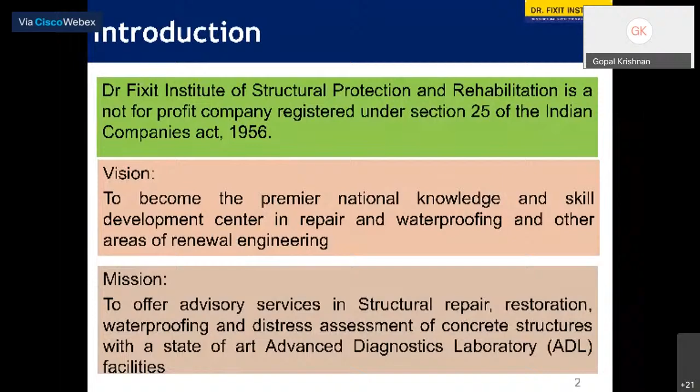My organization, on behalf of, I'm from Dr. Fixit Institute of Structural Protection Rehabilitation, which is a not-for-profit registered company, registered under Section 25 of the Indian Companies Act. Our vision is to become a premier knowledge center in the country on repair and waterproofing and other areas of renewal of engineering. Our mission is to provide advisory services on structural repair, restoration, waterproofing, distress assessment of concrete structures with state-of-art advanced diagnostic laboratory facilities, which is created at Mumbai. So we have been providing these services for the past 12 years successfully across the country, to several industrial, corporate, individual, or many institutional clients. That is a brief introduction of my organization.

And my organization is having a tie-up and collaborating with international bodies: the Concrete Institute of Australia, National Roofing Contractors Association of USA, the Concrete Society of UK, International Concrete Repair Institute of USA, where we collaborate on the latest development techniques. We even call our experts, exchange information, and understand the latest developments across the globe. We are having collaborations with several organizations, many at the national level, which I'm mentioning here.

What do we do exactly? One, we try to provide a holistic solution, because now during the monsoon or later part, leakage is one of the main issues for individual house owners, corporate or commercial establishments, or industries. So we provide a scientific solution. That is one. Second, we conduct petrography on rock, aggregates, and concrete to understand the mechanism of deterioration, for example in fire damage structures. It's an important tool to understand the sensitive damage, what temperature the damage happened at, and what is to be done. So understanding that gives a little bit of investigation into fire damage structures by using petrography technique.

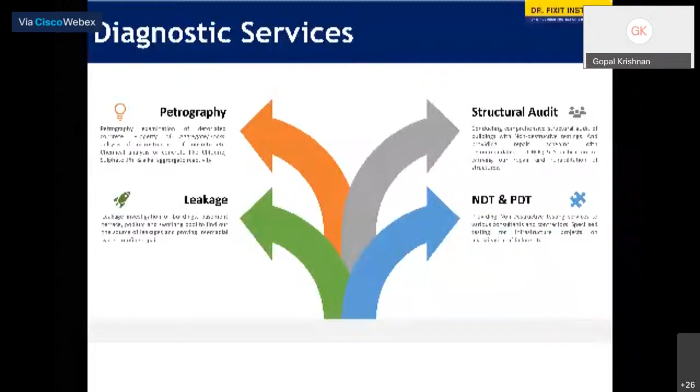The third one, we conduct condition assessment of industrial buildings, industrial structures, and houses or commercial buildings. We call it structural audit. There we provide all the details and start the testing—some partially destructive testing to understand the properties of structures. We provide this service to consultants and predominantly other agencies in the country. So these are our main services. What I explained here, I can show that there is an advanced diagnostic laboratory which is located at Mumbai.

All the facilities got accreditation from the National Accreditation Board for Testing and Calibration Laboratories. In short, if I issue a certificate from my laboratory, it is not only valid in the country, it is also valid globally.

Even other countries can recognize and accept it because it follows international standards, and we have accreditation for that, which we have been maintaining. Not only that, we are providing proficiency testing services to other testing labs or agencies. When they go for accreditation, this is a mandatory requirement for them to complete. Yearly, 100 to 150 individual organizations come to us, participate, and show their competency after getting certified by us. For that also we have an accreditation.

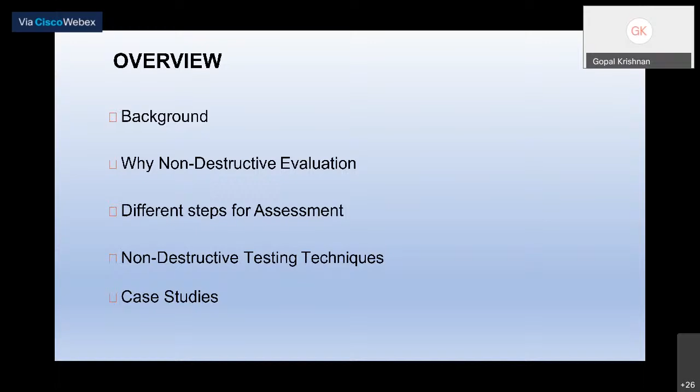Meanwhile, I'll be playing some audio visuals. If you are having any issues, let me know so I can try to set it right. Am I audible? Is it okay now? Yes sir, audible.

Let us start with a bit of background on what happened. Since I am staying in Mumbai, I know what's happening there very much. I may not be knowing your place, so you have to tell me the situation there about the durability of the buildings.

In Bombay, it's a routine every year. During the monsoon, we get to know this building collapsed in a particular area, another building collapsed, so much life lost and other things. We never have a monsoon without such an incident. Even this year, there are already 2 incidents in Bombay, one in the suburb and one in the city.

So 1.5 lakh buildings got BMC notice to get the structural audit. There is another news also: structural audit of old buildings largely ignored. Yes, many of our people don't honor this law or don't follow it. Hardly a very few percentage of people go meticulously, conduct the audit, submit the report to BMC, and take the repair, rehabilitation, whatever is required.

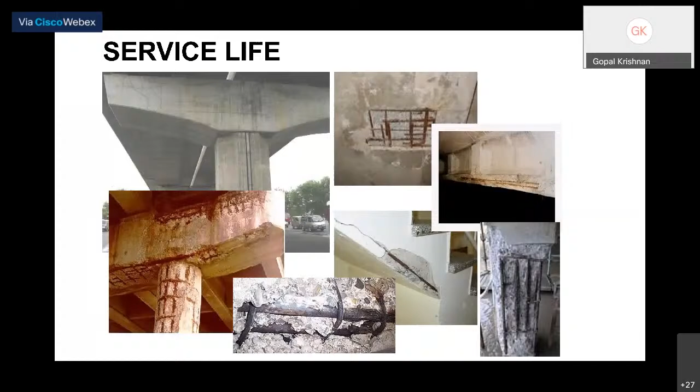Okay, now when talking about service life, we need to understand all buildings are not achieving the service life. What is service life? It is defined as the assumed period for which a structure or part of it is used for its intended purpose with anticipated maintenance, but without major repair being necessarily done. So without necessary repair, regular maintenance like painting, some patch repair, that's okay. Major repair like strengthening, jacketing of beam, column, or structural members should happen only after the service life.

That is for the other European countries, other countries in the cold region. Mainly carbonation, chloride ingress, and alkali silica reaction are the parameters affecting service life. But when you understand durability, what are the others? Weathering action, chemical attack, or abrasion, while maintaining its desired engineering property. So those factors affect the durability.

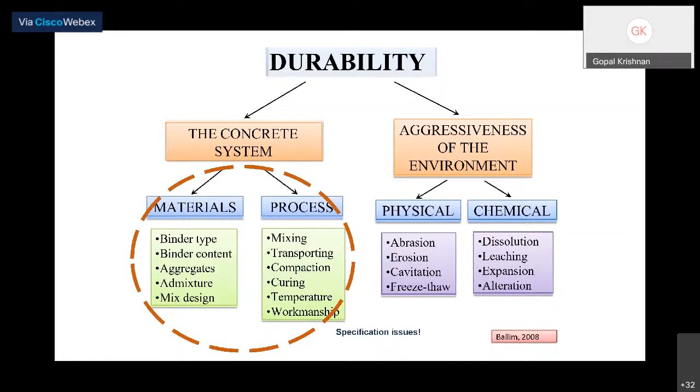So these are very important things. Material and process are in our control, we can do a better job here. Now, when talking about durability, the cover concrete - many people ignore the cover concrete, they don't give it much attention. Cover concrete is what provides durability to the structures. You have to remember that.

So cover broken means what happens? You get exposed the core, easily the reinforcement gets affected. So the cover needs to be protected.

One is depassivation of the steel reinforcement due to external environmental conditions - that is the first phase. At this point, corrosion is possible, but there is no observable or actual physical damage visible in this first stage. The development of corrosion occupies a volume significantly larger than the original steel - generally we say the rust occupies 3 to 6 times the volume of the original steel. So what happens is cracks form, the crack widens and facilitates penetration of moisture and aggressive substances into the concrete, promoting a faster rate of corrosion, eventually leading to spalling of the cover concrete.

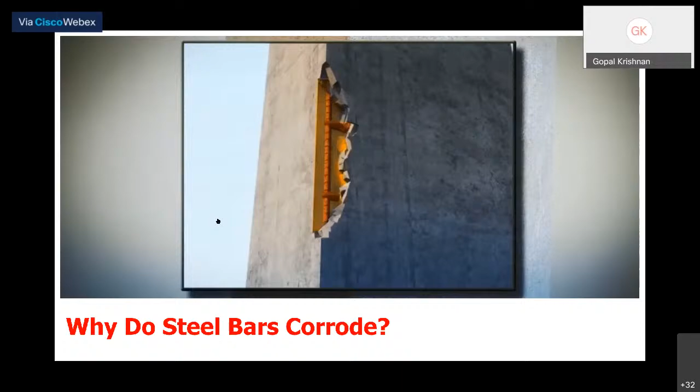Corrosion can be described as a process, a chemical reaction, where refined metals such as steel and iron return to their more stable combined forms as oxides, carbonates, or sulfides.

In this chemical reaction, a section of the steel material acts as an anode. This means that the steel loses electrons.

On the other hand, another portion of the reinforcing mesh acts as a cathode. In the cathode, oxygen combines with water and the electrons to release hydroxide ions. This shows that the reactions require both water and oxygen to occur.

The volume of corrosion products, especially Fe2O3, is significantly higher than the original steel. This will increase the internal pressure and consequently crack the concrete.

We know that the availability of these three elements are essential for corrosion to happen. The reaction requires water and oxygen. However, experiments in real case scenarios show that chloride plays a key role in the onset of corrosion.

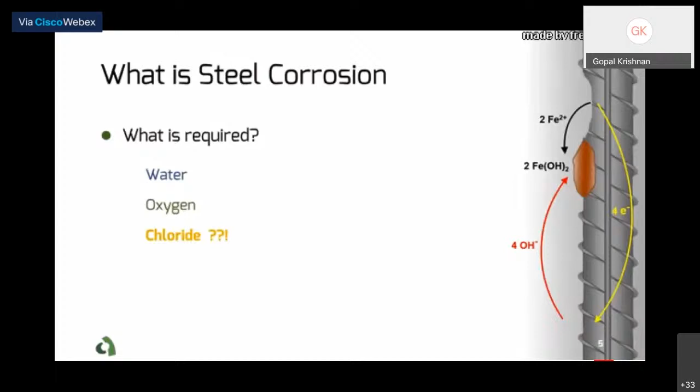Concrete provides a high alkalinity environment around the reinforcement. In normal conditions, one can expect this will protect the reinforcing bars from corrosion. At the same time, we know that concrete is a permeable material, as moisture and aggressive ions can move through the pore structure of concrete.

The interesting question that arises here is the role of chloride ion in this reaction. This has been the topic of research for many corrosion specialists around the world, yet there is no definite answer to it. A very basic explanation is that the ingress of chloride destroys the protective oxide layer on the surface of rebar. This eventually destabilizes the protective film over the reinforcement, which eventually leads to the initiation of corrosion.

As I mentioned earlier in this presentation, the porosity of concrete makes it possible for ions to penetrate into concrete and make the concrete itself act as an electrolyte.

Corrosion happens in this environment, and the movement of electrons in concrete creates an electrical potential field inside concrete over the surface of rebar. For example, the reactions in the anode, where steel loses electrons, can create a potential difference of negative 780 millivolts compared to a standard copper sulfate electrode.

The cathodic reactions would result in a potential difference of positive 160 millivolts.

The traditional way of investigating corrosion is visual inspection. However, when damage is detected in visual inspection, it is already too late. Signs of corrosion are often marked with delamination, which is the result of corrosion materials expanding.

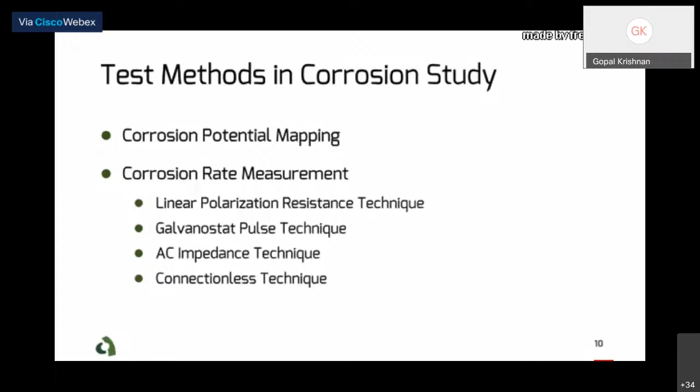The second concept is the rate of steel corrosion. The corrosion rate is about the kinetics of reactions and how fast the corrosion is progressing in the concrete. This becomes important in the context of life cycle assessment, as it helps engineers better predict the remaining service life of a given structure. So let's talk a little about these concepts and measurement test methods.

The half-cell test can be used to predict the corrosion potential from the surface of concrete. Several associations have standardized the test procedure, including ASTM, UNI, and RILEM.

In the half-cell potential method, the potential values at the surface of concrete are measured with respect to a reference point.

Concrete surface should be prepared before doing the test, that is to remove paint or other non-conductive layers from the surface. The surface should have a minimum amount of moisture. A sound electrical connection should be established between the reference electrode and reinforcement.

The value is normally presented in contour plots, showing different half-cell potential values. This helps identify areas with a higher chance of corrosion.

For example, ASTM C876 introduces 3 different ranges for the measurement. Half-cell potential values less than negative 350 millivolts, measured in reference to a copper sulfate electrode, represent an area where probability of having active corrosion is more than 90%.

When measurement is higher than negative 200 millivolts, this probability is less than 10%. Results for half-cell potential values between negative 200 millivolts to negative 350 millivolts is uncertain.

Corrosion can be described as a process. Let us continue further. To understand the corrosion and deterioration mechanism, we conduct a structural assessment.

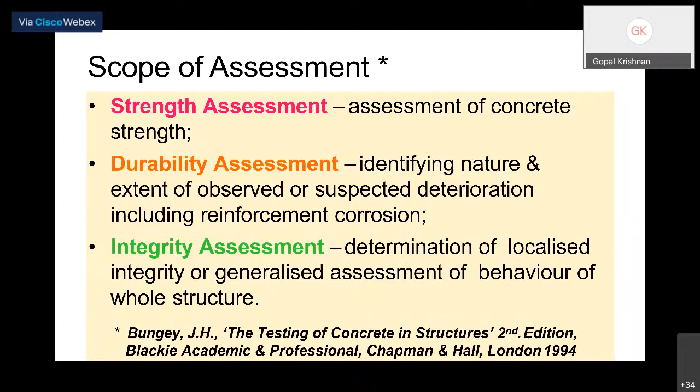For conducting structural assessment, there are different scopes. One is strength assessment - if you want to assess concrete strength, we can do certain tests. Durability assessment involves understanding the deterioration, whether corrosion has happened and to what extent. Integrity means understanding the behavior of the whole structure. So the scope of assessment needs to be defined initially before we start.

Non-destructive testing evaluation is required for routine inspection checks, like condition assessment of structures with a given frequency. It may also be for legal purposes - the seller wants to know the condition, or the buyer wants to check the condition of the building. Then maybe the structure is in distress and they want further planning - whether we need to redo or repair. The third reason is when doing repair rehabilitation, what extent is needed, what is the cost, when it can be done.

And finally, retrofitting to current new standards. That means if you're currently occupying and using the building for some purpose, you want to convert or increase the live load or dead load, or add two floors above. So you try to understand the condition from a retrofitting point of view. This covers all the requirements for evaluation using non-destructive testing.

Structural testing is required mainly to determine strength, or to check the quality and condition of the structure, or whether there's any integrity issue. If there's any localized issue in a specific area, we check that to assess the potential durability of the structure as a whole, and to identify the causes and extent of deterioration currently happening. These are the reasons for conducting structural testing.

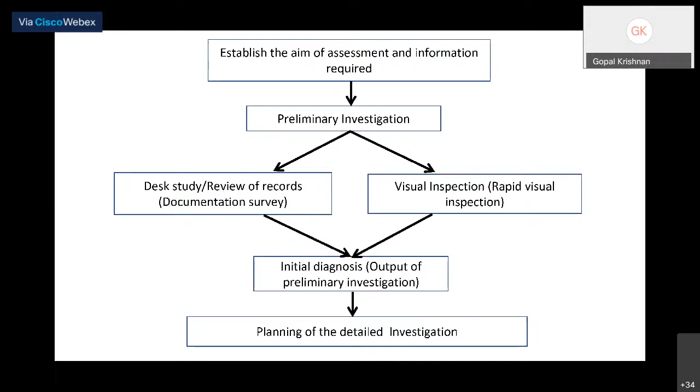We do preliminary investigation, desk study, reviewing document records, repair history, etc., and rapid visual inspection to identify deterioration and its reason. Then we do diagnosis and planning for what is required further - that is planning for the detailed investigation. This is the initial assessment.

When we go into detail, we do sampling, because we cannot test every member. So we select members - how many percent and how many members we are going to test. We conduct initial in-situ testing, then send samples to the laboratory to understand the strength, properties, and chemical properties, etc.

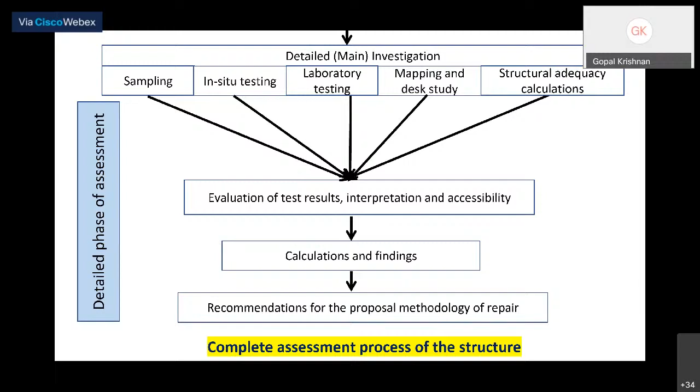So phase 2 covers all the testing, interpretation, and making a final report for recommendation. This is the complete assessment process of structural assessment. In this stage, there are a few steps involved - one is that we conduct step one, visual assessment.

Second, the NDT scheme: what test to be done, where to be done, what is the number, because this also involves a lot of cost. If you want to specify more number, definitely the cost multiplies.

Number three, we have to depend upon a group of NDT tests, not a single one, because in many cases nowadays people do one or two tests and conclude the condition of the structure. It's not like that. We need to conduct a group of NDT testing to supplement each other. Then some destructive tests also need to be conducted.

Then laboratory tests, as I mentioned previously, the interpretation of all the NDT tests and laboratory tests, prepare the recommendation, and finally give the cost estimation—how many members we are going to test, what kind of method we are going to adopt, based on material selection, and based on that we will have the cost estimation. This is what we do in the initial stage to understand the overall structure.

When talking about visual inspection, we may use a sounding method using a hammer or dragging a chain. This technique is followed when a larger area is involved. But further, we select non-destructive testing.

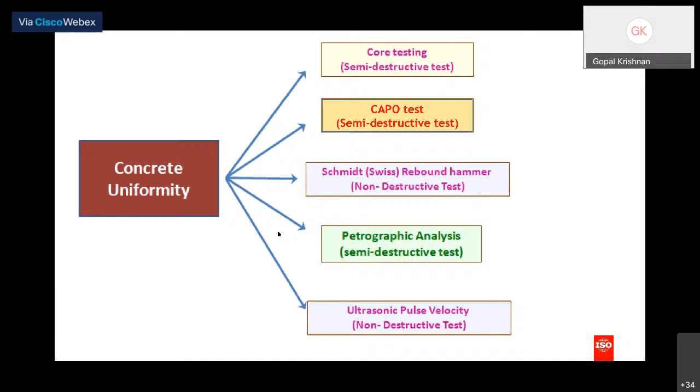Then ultrasonic pulse velocity—this is one of the tests if you want to know concrete uniformity. Then delamination, voids, and cracks—these all create problems for the durability of the structure. Or hammer sounding test, chain drag test, which I have shown you.

Then impact echo test to understand uniformity—any delamination or voids present below. Infrared thermography to understand not only delamination but also the source of water leakage, along with ultrasonic pulse velocity, and remote viewing through sensors.

Sometimes this may not be applicable. We have to insert strength sensors at critical locations and keep monitoring through GPS—that is remote sensing. All these parameters we can select.

So when you understand the compressive strength using NDT methods for compressive strength properties, a simple and quick method is the rebound hammer. To understand the integrity and homogeneity, we use ultrasonic pulse velocity. And the cut and pull out test gives us quick strength.

Instead of doing a core test and waiting many days to get the strength, the cut and pull out test helps you get quick strength. Maybe 20 minutes you can spend to do the test in the field, and then and there you can get the strength of that particular concrete or member.

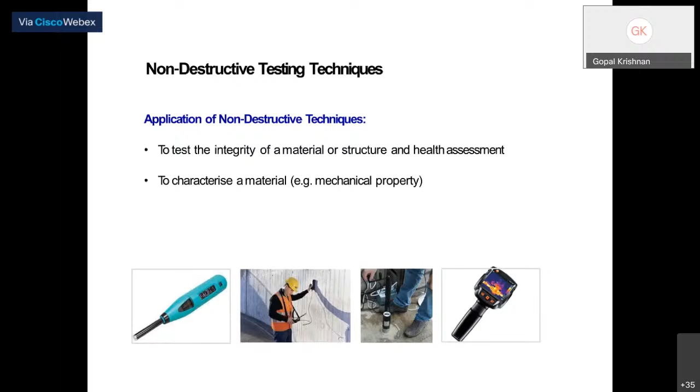As we are discussing destructive testing, one example is the core test. Another is the pull-out test, where we also need to drill and cause partial damage to get the pull-out result. These come under destructive testing. What is a non-destructive method? Like the Schmidt hammer or ultrasonic pulse velocity. These and several other techniques are used as non-destructive testing techniques.

So let us see one by one. One is the Schmidt hammer. It's very simple and very useful. We can get the in-place uniformity of the concrete. It's very easy to use, mostly in the field, and can study the uniformity of the concrete. This is also based on the surface condition; presence of rebar and presence of subsurface voids can affect the test result.

The standard is IS 13311 Part 2. The principle is measuring the rebound of a spring-driven mass hammer after impact with the rod in contact with the concrete surface, as you can see here. You push to release the rod and prepare the test, and we note the rebound number in the lock position. That's what we are going to do.

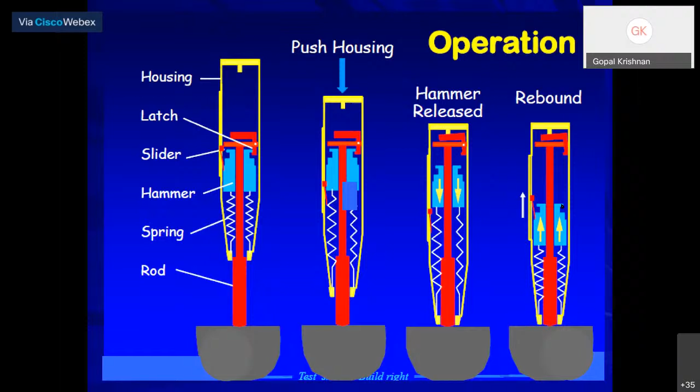This is a very simple hammer, but how does it work? You push the housing and release the hammer. The force is returned back, so you can see the number displayed or shown on the hammer. That is the principle it works on. In the test, you can understand the rebound number noted here is 41.

Now let us look at a new hammer that comes with a Q value. Generally, the R value is used for manual or digital instruments. But the Q value is from a more electronic instrument, which has a higher correlation coefficient of 0.97 compared to 0.84 for the R value. So you get more accurate results with the latest Q value hammer.

The Q value is not affected by the orientation of the instrument, so we don't need to do the correction. It tends to have less dispersion than the traditional rebound hammer. Anyway, the Q value is not comparable with the R value.

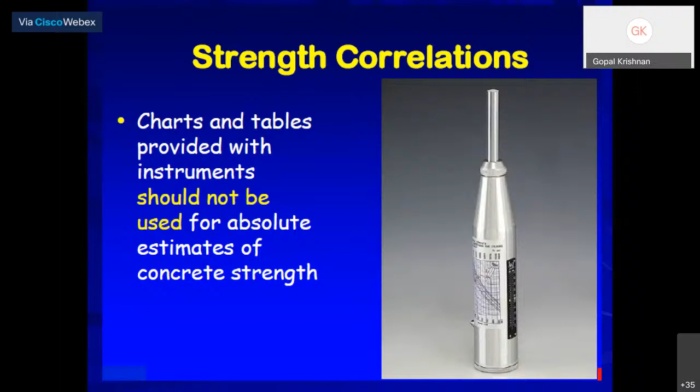The standard says that to get the strength, we need to prepare a comparison chart. Provided the instrument is used properly, we take the estimation of compressive strength based on similar material testing done previously. Based on that, we can get the closest estimation of compressive strength. We cannot give the exact same value - that we have to understand. That's why we say we have to take other groups of tests to establish the correlation. We cannot decide any stability parameter with only this particular test.

What are the factors affecting the strength and elastic modulus of concrete near the surface? Like aggregate type dependence, or thickness of the carbonation zone - more than 50% of the strength result can be affected because of carbonation. Also the surface structure, whether smooth or rough, affects the result, along with surface moisture conditions and rigidity of the test object.

There are so many reasons the results get affected - we have to be careful. That's why we take several readings, and we take the average of 6 readings to report as the rebound number.

As shown here, we can see different directions and what strength correction, or angle correction, we have to make. When testing a stronger portion, you will get a higher rebound number. When testing a weaker portion, the result depends on the surface. As per ASTM, they take 10 readings and report based on that.

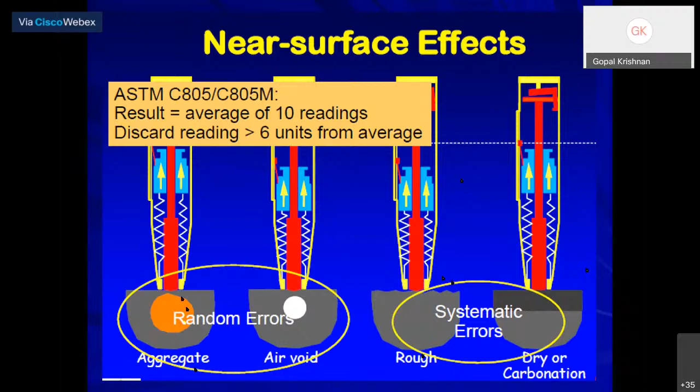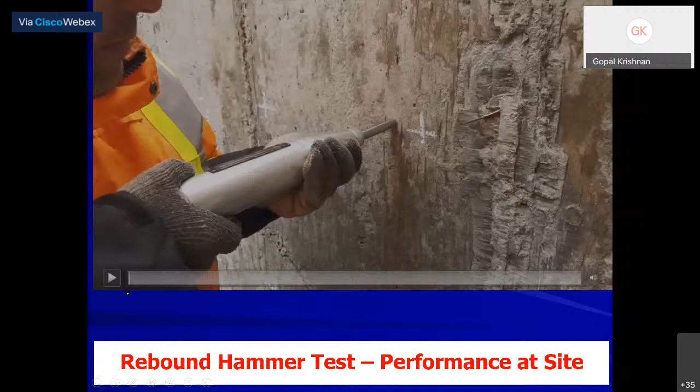We'll be covering a quick overview of the rebound hammer testing method. Since its introduction in 1948, the rebound hammer has been extremely popular due to ease of use. It is an inexpensive, quick method for non-destructive testing and evaluation of concrete, used to assess the uniformity of concrete and to estimate the strength development. In order to test, the plunger is pushed against the concrete.

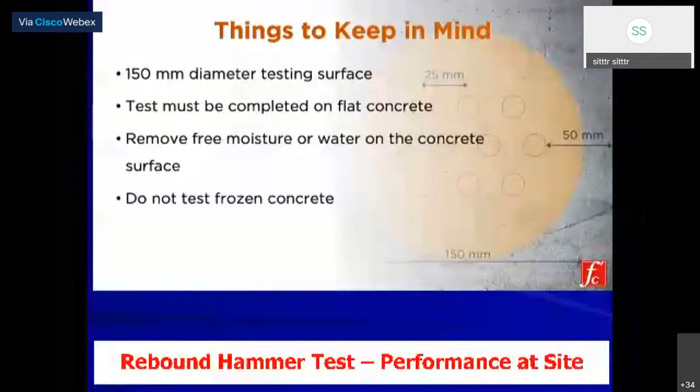The test surface should also always be smoothed before testing. Concrete surface laitance must be removed. And finally, it's important not to test on frozen concrete. Concrete should only be tested after it has thawed, since frozen concrete tends to have high rebound numbers.

Although the rebound hammer provides a quick, inexpensive means of checking the uniformity of concrete, the results can also be affected by the following parameters: smoothness of the test surface, size, shape, and rigidity of the specimens, age of test specimens, surface and internal moisture conditions of the concrete, type of coarse aggregate, type of cement, carbonation of the concrete surface, and type of mold.

With recent advancement in sensor technology and development of wireless communication, a new generation of rebound hammers are commercially available. Recording and tracking job-specific details, including hammer angle and on-site verification of test results, was time-consuming and prone to errors. The new generation of hammers help engineers get around these issues. For example, new generation hammers apply real-time checks on the quality of datasets and do not need to be adjusted for the configuration of the hammer.

Yes, so typically this hammer needs to be calibrated. Can you hear my voice? Yes sir, yes sir, can you hear in response? You're audible, sir, continue now. Yes sir, okay fine.

I'll use this anvil for calibration. Every 2000 impacts, you need to calibrate.

So how can we use the correlation curve? The 10th percentile curve is used for correlating the likely strength of the concrete.

This will help to minimize the number of cores needed. Core taking is a very tedious and destructive process. We can take collected samples representative of the investigated structure wherever we are able to do a comparative study. So we have seen the limitations there, now let's quickly move through the next topic: ultrasonic testing of concrete.

Ultrasonic testing of concrete is an efficient method for quality control of concrete material, detecting structural damage. For this, there is a latest standard, IS 516 Part 5 Section 1, published for UPV testing. The old one, IS 13311 Part 1, is now withdrawn, but it's still valid of course.

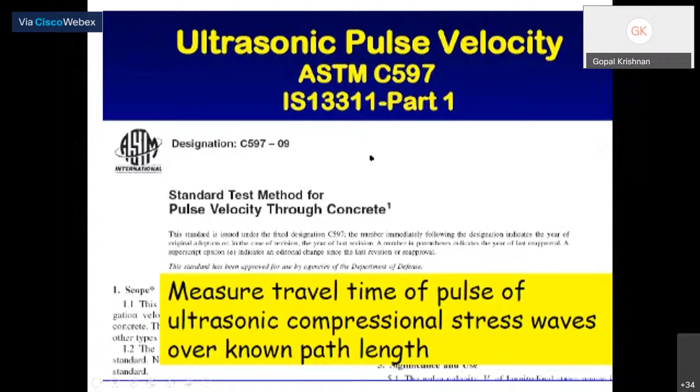The UPV methods have traditionally been used for quality control of materials such as metals or welded connections and RC structures. The latest transducers can...

...uniform, what is the path length traveled by the time gives the velocity. I am not taking much time on this. Now you can see the transmitter and receiver receive the signal and it is displayed on the screen. This is the latest Pundit lab, which can give more accurate results.

The concept uses different types of methods. One is transducer and receiver direct to each other in opposite directions, called direct, which is more reliable and gives accurate results. Semi-direct is used sometimes when we may not be able to get the direct method. Sometimes only surface probing is possible, but it is the least reliable in terms of accuracy. Only advanced users can interpret the result. These are the methods we use.

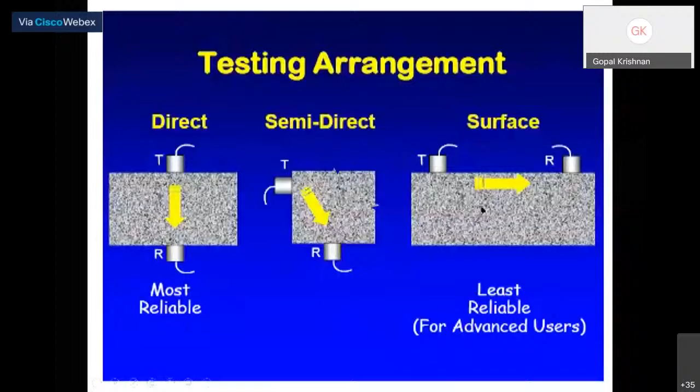And that... well here... concrete. We can see that. Yeah. Can you say something? Okay. So... voice was... okay. I see, I see, let me check it. My signals are correct. Okay yeah, there's some... yeah. Just a minute so that I will... like now it's okay or still the same? Now it is okay, sir. It's okay, no? So you want me to repeat or continue? Just repeat from the previous slide, sir. Yeah, this one onwards, sir.

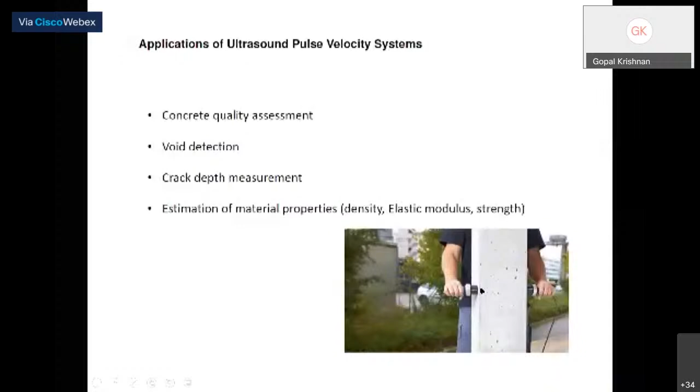I'm not going to read that straight away, but let me show the applications. We can detect delamination through pulse velocity determination, and we use it for quality assessment of ultrasonic pulse velocity, establishing homogeneity and uniformity of concrete, measurement of surface crack depth, and prediction of the compressive strength of concrete.

UPV is used for reliably understanding homogeneity and strength, as we've been discussing. This also affects certain parameters of concrete properties, such as whether the transducer is properly placed or not, and the presence of voids.

Sir, again there is some disturbance.

This can be due to the rising of alkali aggregate, alkali silica reaction, or corrosion.

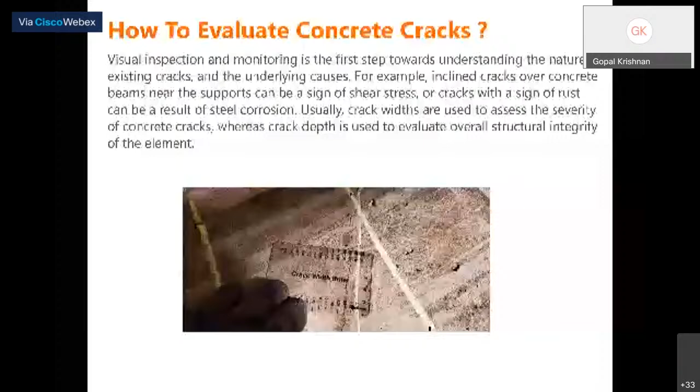Earlier, cracks happen due to many reasons. Usually we try to measure the crack width with a scale, but knowing the depth is very important. As an engineer or structural engineer, you want to know what is the depth of the crack, so that you can take appropriate action.

Crack depth is evaluated to assess structural integrity and verify durability performance. One method is to take a core and observe the depth directly. The second method is to use non-destructive testing to understand the crack depth.

Better than explaining, let me show you an audio-visual demonstration so you can understand. Please tell me if it is clear or not.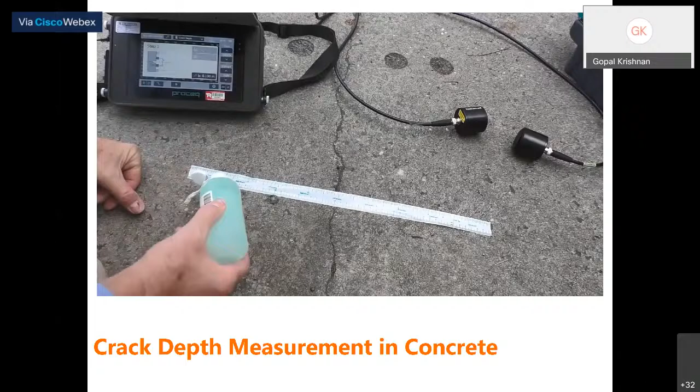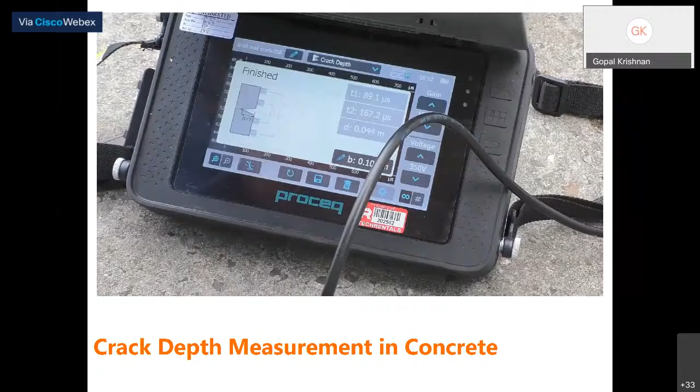For determining thickness of concrete, but also can be used for crack depth. Today we're just going to have a quick look at determining the depth of a crack in concrete. I'll turn the instrument on, hit the button, and select measurement mode. There are selections here because we've already selected crack mode. Here's dimension B, 10 centimetres or 100 millimetres, the distance either side of the crack, and twice that is 200 millimetres, or 20 centimetres. I'll put some coupling gel on the ground in line with this, a bit here, a bit there. Now I'll place the two transducers, one here, one there, next to the tape. I'll hit play. This is auto mode, where it automatically jumps and finds the signal. I can see clearly the signal is received, so I'll select that. Next, I'll move to the second set of measurements, placing the transducers at new points, and hit play again. It's not jumping properly, I hit something by accident, let me come back out, I hit zoom by mistake. I'll set it back to auto mode. Now it's jumped to a spot, but I can see the clean sine wave actually starts a little earlier, so I'll move it back, and now I can see the sine wave starting clearly there. I hit finish, and it shows a crack depth of 44 millimetres. That's how simple and quick it is to find the depth of cracks in concrete. Nice little instrument, thank you very much.

When determining crack depth, the crack may not be a straight line. The crack profile can zigzag, so we have to measure at several points and take the average to get the exact depth, because some cracks are shallow and some are deep. Taking the average gives us a more accurate reading.

Based on that, we can report the readings: crack 1 is 0.083, crack 2 is 0.044, crack 3 is 0.060. We report these so that we can take the appropriate measures to repair the cracks.

The second instrument is the cover meter, or profometer, which works on the eddy current principle. It detects the cover as well as the diameter of the rebar. We can get both more accurately, within 1% accuracy. This picture shows how they are measuring it in the field.

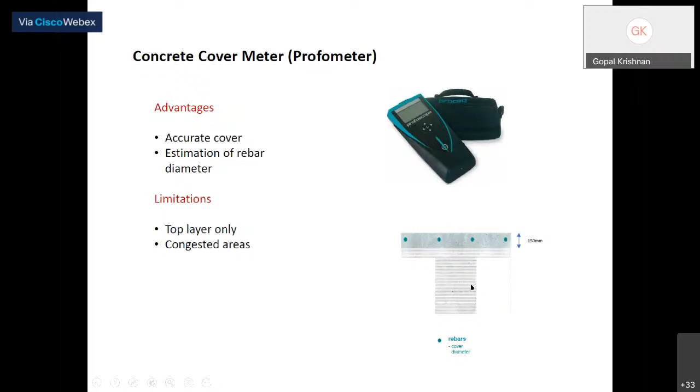Second is carbonation. You all know the carbonation process and chemistry, so I'm not going to repeat it. The pH should be above 12. Carbonation affects this by dropping the pH below 9 or 8.5, so the passive layer breaks down and corrosion progresses in the presence of oxygen and moisture.

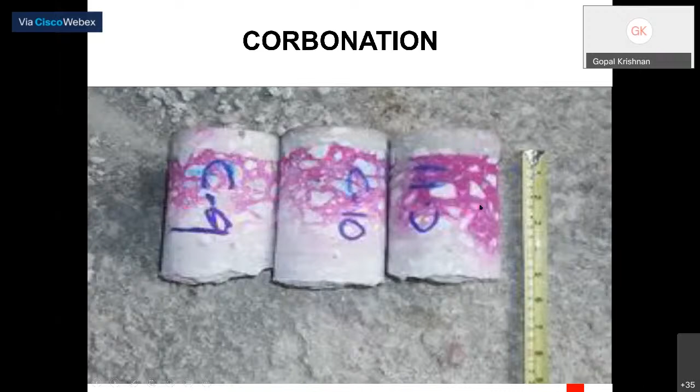When you take the core, you can spray 0.2% concentrate phenolphthalein and see where the color changes, so that we can measure the depth of carbonation from the surface. This is one example with minor corrosion, very minor in this case. If you see the next one, the carbonation depth is much higher than the previous one.

We will move to the next topic: corrosion inspection and monitoring. When we commonly observe existing reinforced concrete structures while performing structural condition assessment, we need to find out the current state of the structures, the rate of corrosion happening, and the remaining capacity and service life of the structures, because corrosion is a very important parameter.

For measuring corrosion, we use the Galvapulse GP 5000, which combines half-cell potential and resistivity measurement, and also gives the corrosion rate in real time. Three properties can be obtained from this instrument. Mainly, we try to understand the corrosion rate.

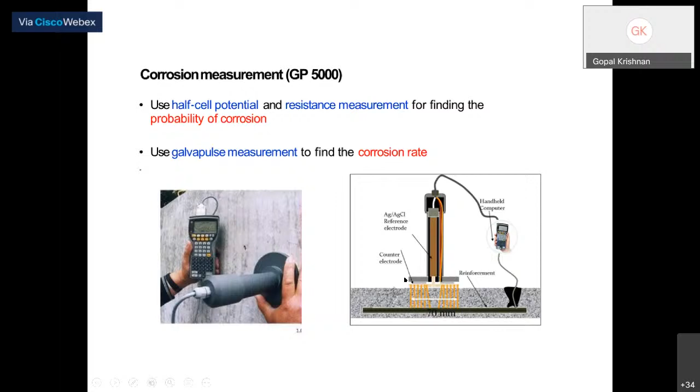Importantly, we use a silver chloride electrode. Generally, half-cell potential readings use copper sulfate, but silver chloride is much more accurate. The scope of this measurement is corrosion rate, half-cell potential, and resistivity, as I said.

This Galvapulse measurement technique is a fast polarization technique for determining the actual corrosion rate at the time of test — real time readings. The instrument looks like this, with the probe and handheld computer, which calculates the resistivity, the rate of corrosion, and the half-cell potential readings. It measures current and resistivity by calculating the galvanostatic pulse measurement.

It tells you how much corrosion you currently have in the structure and the potential for corrosion in the future. Based on that, you can determine what action to take. Why use Galvapulse? Because it gives the corrosion rate, which other instruments don't, only half-cell potential reading. It predicts the lifetime — we call it residual life of the structure — whether after a certain number of years it will have complete corrosion and the structure will deteriorate fully. Proactively, you can extend the service life of the structure by decreasing the rate of corrosion and providing control measures.

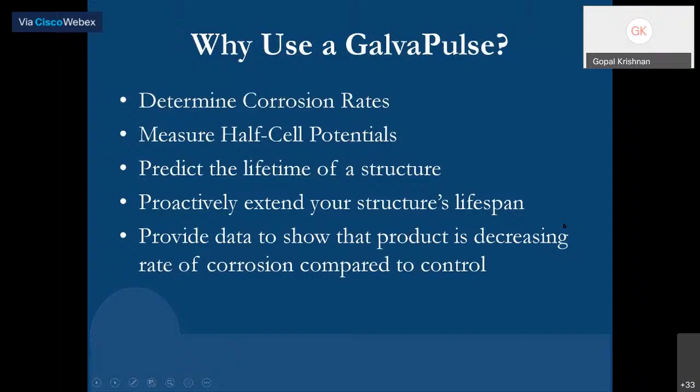When you are estimating the corrosion rate, if it's lesser than 5.8 micrometers per year, based on that you can determine the corrosion level. It is a passive level, so there is no deterioration taking place, no visual deterioration.

Then 0.5 to 5 microampere per centimeter square corrosion happens, which is a rate of 5.8 to 58 micrometers per year. That is the low level of corrosion, greater than 10 years. For 5 to 15 microampere range, 58 to 174 micrometers per year corrosion rate happens, considered moderate, about 3 to 10 years.

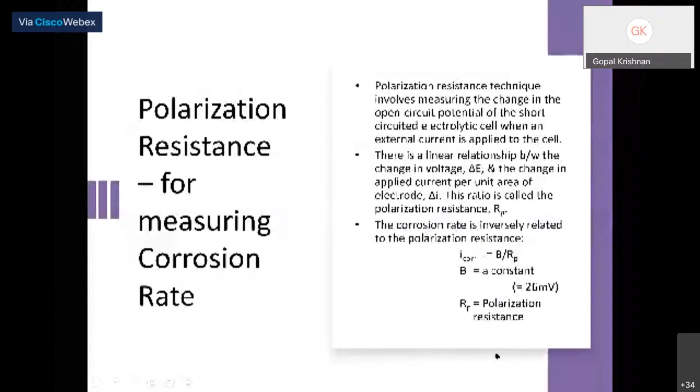When doing this, even within 10 seconds, you can apply a galvanostatic pulse into the structure. We can get the electrode reading, and we need to probe with the electrode in a different grid format. We can do that.

From recording the voltage history, we can evaluate the polarization resistance RP. The grid ring which I showed is used to do the grid mapping.

The Stern-Geary relationship curve, we can see here: 1 microampere per centimeter square equals 0.012 mm per year. This is what we get from the Stern-Geary equation relationship.

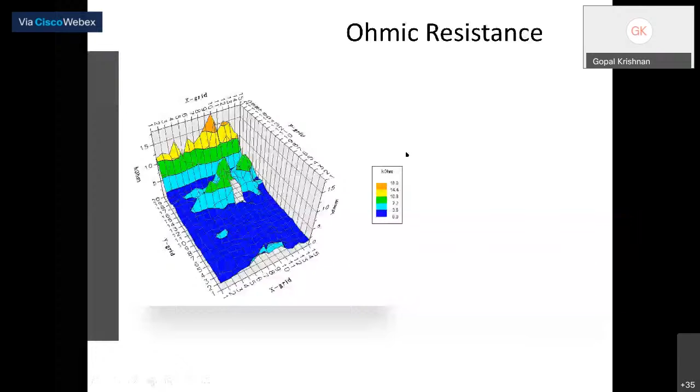Similarly, the half-cell potential reading, then resistance in ohms. We can use this for understanding the service life estimation of the structures.

Evaluating measures such as application of corrosion inhibitors, membranes to protect the structure, or electrochemical removal of chlorides using the latest techniques, and also as a condition survey of corrosion activity continuously. This can be fixed permanently, and we can understand what is happening on a time-to-time basis.

We can say that if it is repaired, once done, we measure the corrosion activity in the repaired areas. So we can understand all the applications of these measurements as per ASTM C876.

How the evaluation of corrosion is given: minus 404 millivolt to minus 254 is 90% probability, high risk of corrosion. Between minus 254 to minus 104 it is 50% probability, medium risk. Higher than minus 104 towards the positive, it is low risk of corrosion, only 10% probability. We can interpret the results accordingly.

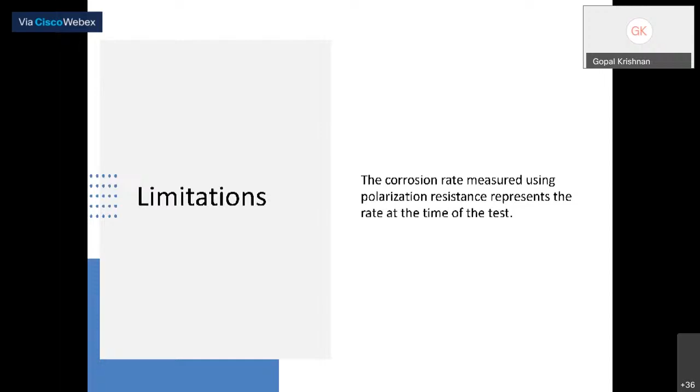So the corrosion rate measured using polarization resistance represents the rate at the time of the test only. These are limitations in this particular test, because corrosion rate happens continuously and it may change.

Anyone suggest that? Do you want to have any break for 5 minutes? So we can take a 5-minute break. I hope we can have a 5 minute break and come back. Please ensure me so I can continue here. Okay, so now it's 3:17. We'll have to come back at 3:22. Yeah, fine.

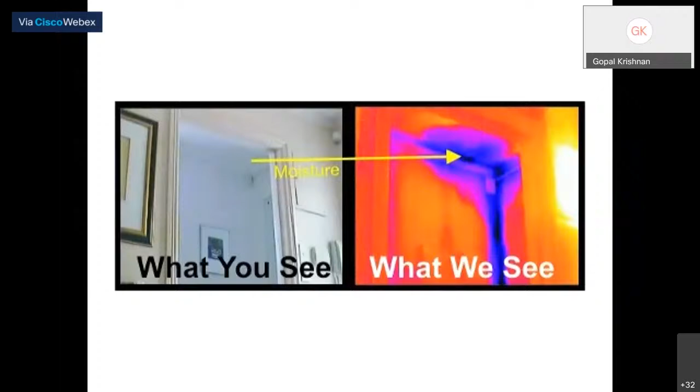As you people know, those traveling through international or national airports now have TV screens monitoring through the thermal imaging technique only. Because of COVID-19, people are coming with high fever. There's no need to check each one with a temperature gun on their forehead. The camera is fixed, and as you keep walking through the channel, you can identify who is having what temperature, making it easy for officials to screen those coming with high temperature.

And understanding roof problems, roof leakages - if you see the normal view you won't be able to understand anything, but if you use the thermal image you can understand there is some issue detected in the thermal scanning. At that particular point, you can see whether the waterproofing membrane is damaged, or there is damage in the slab itself, or some other problem. So we can identify and pinpoint the exact location instead of beating around the bush.

It is a rapid screening. You can save a lot of time, and you can rectify the problem in a rapid way.

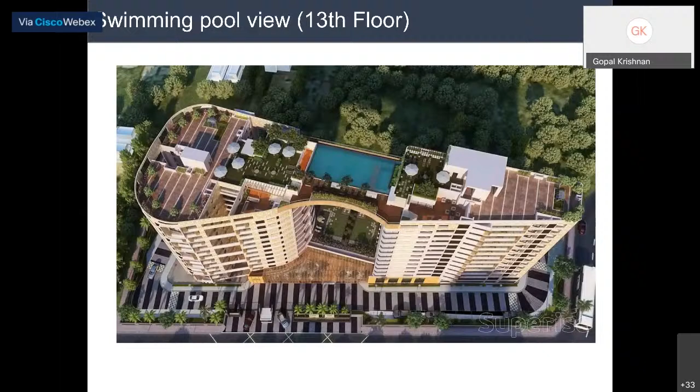Everybody started trying to contact me, even for small issues they were trying to call me. Then I told them, if there is anything important I can travel down - there will be worth for my travel from Bombay to Bangalore. It's not that I'm staying there, I can visit all the sites at once. So whenever there's a problem, that particular client is still in contact with me trying to sort out the problem. I'm going to explain what was the reason.

So this is the swimming pool in a close-up look. It's a very luxury apartment, a very posh locality. The size of the swimming pool - there are two swimming pools. One in front is a kids' swimming pool with 0.6 meter depth, and 1.2 meter depth for the adult one on the other side.

So you can see the closer view. They put some barricade to guide the water. Yeah, close look I show. Yes, it's already open. The water is dripping from here continuously from the deck.

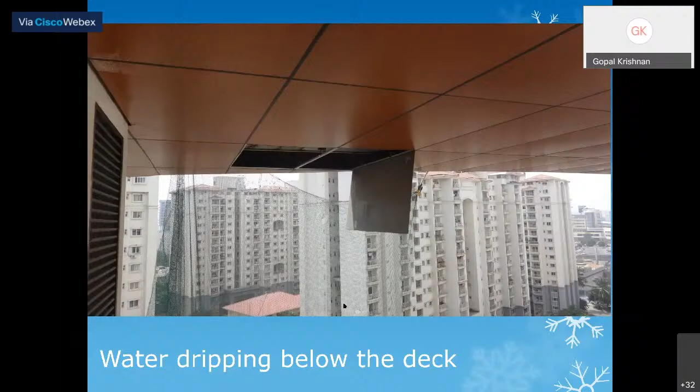If you go to the 13th floor, there is a one trap entry. It's been very difficult for me to enter. I went several times below the swimming pool to assess what's happening. They have been doing a lot of repair activity. They are not able to sit even, the height is so less than 0.4 or something. But people are there grouting and doing something in the blind way because they don't know exactly what is happening.

So you can see there is a small passage we can enter. It's completely dark there. You have to carry a torch when you go there. Now the deck is there, that's why the leakage is not able to be seen on the floor anywhere. Only on the joint between the wall and the slab joint, there you can see the water dripping continuously. We don't know where it's coming from. Only the edges, both edges, you can see the water dripping. They are blindly grouting there to stop that leakage without knowing the source.

So totally a mess. They did a lot of chemical injection. Nothing happened.

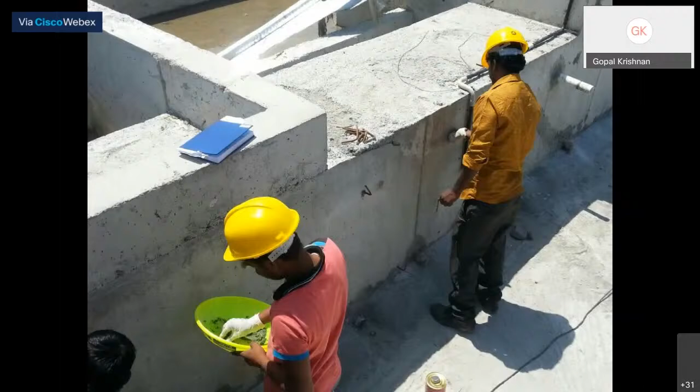When you see how it was constructed, this is quite an interesting history. They have taken one of the top waterproofing systems, which has very high elongation property, tensile property, and durability property. Even in 25 years, there is no need of doing anything, any repair maintenance. That kind of product they have chosen. Still, the water started leaking.

So I am showing step by step how the surface preparation was done, there is a primer done, and there is a geotextile, and there is a mesh over it, and again the guniting work done to strengthen that waterproofing system. Okay, now you can see guniting and the ponding. It was kept more than 2 weeks. There was no single drop of leakage during the construction. Everybody was quite happy.

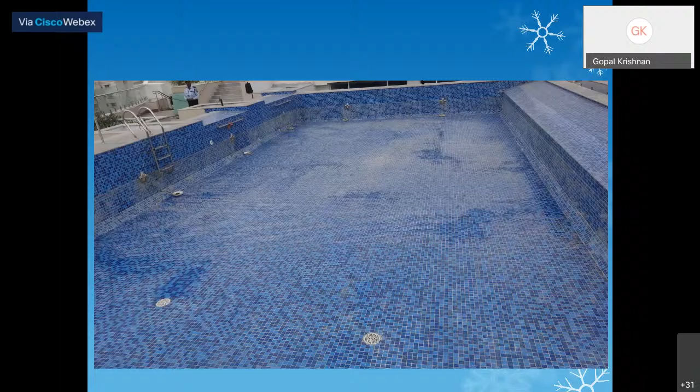Okay, so this is the one. When I visited, before I told them to empty the swimming pool, I started investigation. I spent 2 days completely, I could not get through anything. On the third day, with the help of infrared thermal imaging, I got the source. So you can see that, yeah.

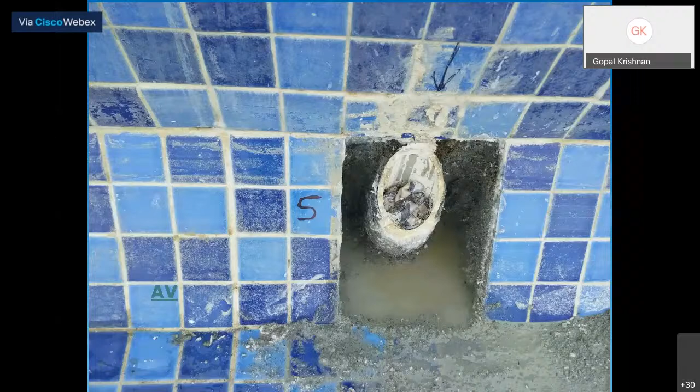Okay, so there is water, it's returning back whatever entered when the swimming pool was filled. When you do that, it returns back because of the pressure. Finally, after understanding the drawing and the pipelines and everything, the damages I found, where the problem is. This was identified as the source of the leakage. Once we did the repair on that particular area, the leakages got stopped completely.

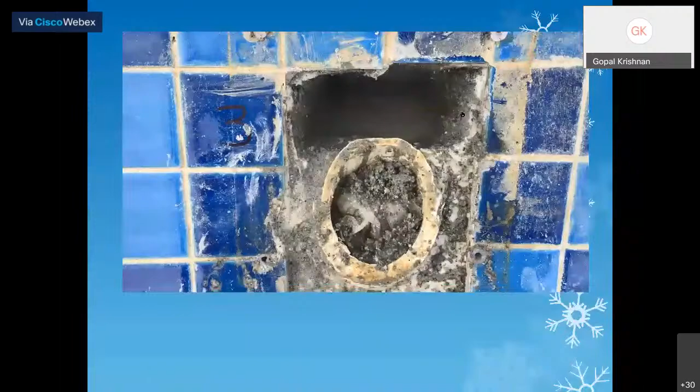Yeah, the source of the leakage was detected, and we asked the contractor to do the grouting in certain areas, and also take proper measures applying the polyurethane sealant, some grout, and fix the tile joints properly. Everything they have done. Then stage-wise, they filled up the swimming pool and observed whether any leakage was coming further or not. This was the completed job, it was quite satisfactory.

Thank you for that, and we'll move on with another interesting one.

Nowadays, if you want to know the strength, definitely everybody goes for taking the core and getting the strength done by the laboratory. So this process takes 4 to 5 days.

In this one, taking proper coring, trimming it to parallel, and curing it 48 hours before testing with capping, then applying the load systematically, that is also very important. Otherwise, the majority of the cores get failed. Doing the core is such a sensitive matter. Most of the time, it gets problematic.

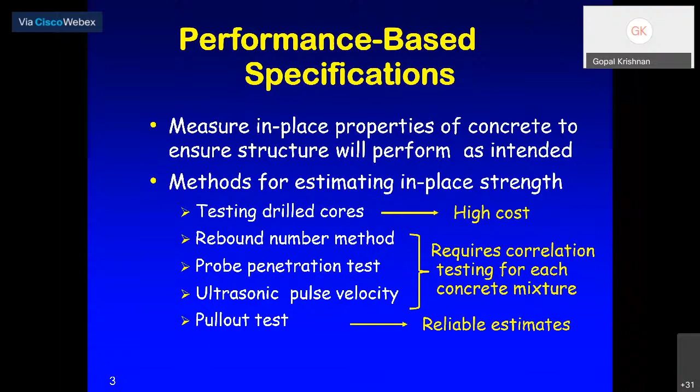So the core, when you do it, it's a destructive test. Not only does it damage the concrete integrity, it might affect the reinforcing bar and the reinforced structures. So what is required? Drilling the core is high cost. Rebound number and probe penetration method, ultrasonic, these require a correlation, we cannot give it as is. So pull-out test gives a more reliable estimate, we can get it directly and understand what is the strength of a particular structure or member.

So as per ASTM C900, we use pull-out test, which is cut and pull out. Second one is cast in place. We have to cast the ring and do that. Very difficult to do it in many cases.

We are not going to do it as a part of the structure assurance. But when the problem happens, then only we are going to estimate the strength. That's why the post installed may not be possible, the cast in place may not be possible. That's why we use cut and pull out.

Just I'm going to explain few slides how the cut and pull out works. When you insert the ring, we have to use applying the equipment to pull out it. Then we will get the conical fragmentation. We can have the correlation of the pull-out load versus compressive strength, so that we can directly convert into the compressive strength. Based on the pull-out test, we can understand the plasticity, so that before formwork or removal of things, we can understand what is the strength achievement.

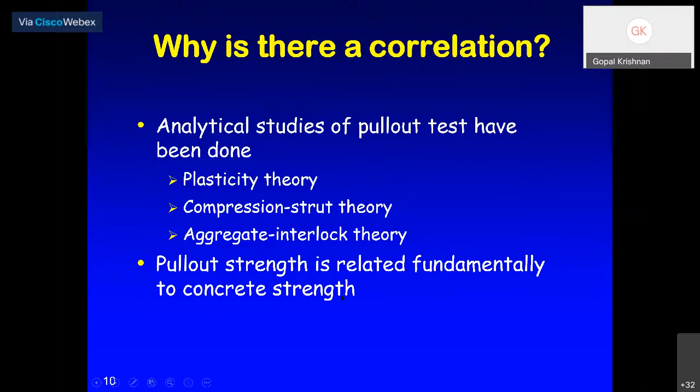Compression strut theory, aggregate interlock theory - this basically relates pull-out strength fundamentally to the concrete strength. You can see compression strut theory. It is not affected by whatever the type of cementitious material, whether it is OPC, PPC, slag, whatever it is. It is not going to affect the water cement ratio. It's not about the age, air entrainment, type of admixture.

Up to 40 mm, no problem. For lightweight concrete, however, there is a different correlation between the normal and lightweight we need to establish. Otherwise, it is not going to affect the density of the aggregate. It does not require pre-planning.

We can perform it at any location, even in structure members. You try to see the reinforcement location in between - we can even do it in congested reinforced locations, we can find a place to do it. And it's an immediate result - you can get it immediate, 20-25 minutes you get the result. You don't need to wait 4 to 5 days like a core.

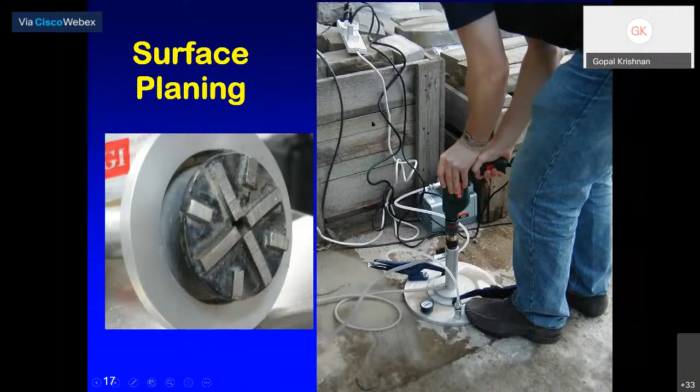So how it's happened - they prepare by drilling the hole, 18 mm dia hole. Like the surface preparation, the diamond cutter is there for preparing a smooth surface. This is one prepared one. And there is a groove under this, yeah you can see that.

Yes, they create a groove. This is a special drill, create a groove. Then we are placing the ring, coiled type of ring. You can see. That one gets expanded when you are pulling out. So we are tightening the nut, then applying the force at 2 points.

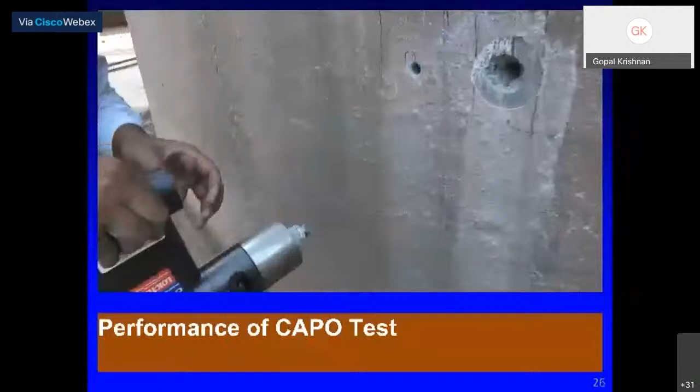You can see that there is one technique.

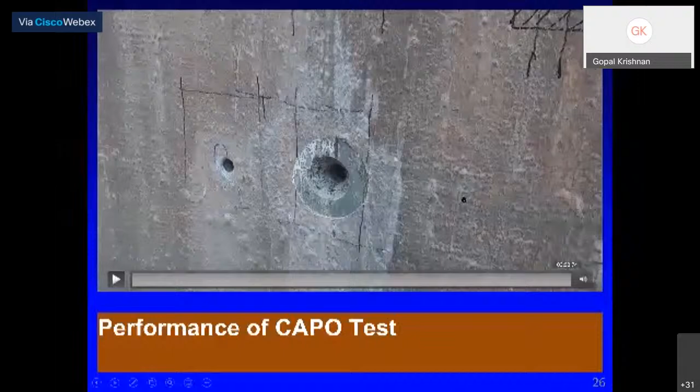Let me explain to you another. Yeah, we can see the damage. This is the only cone portion got damaged. This is a ring actually.

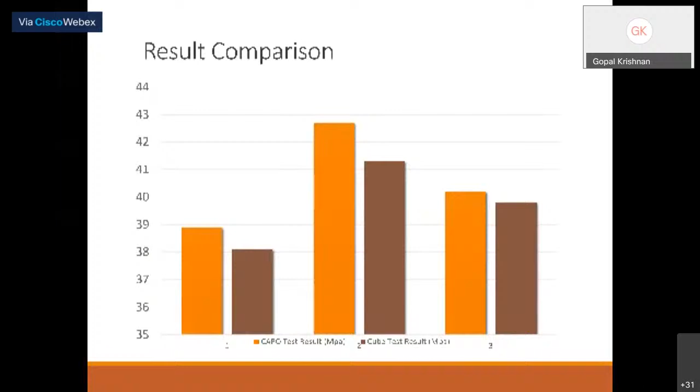Then studies here, I can show you what is the result we conducted. One is the capo result and the cube result. One is used for doing the pull-out test, second one used for the normal compression. In both, you can see how much closer reading we have got. This is the first one.

The second one, you can also see when comparing to the core - same place where we have taken the sample, adjacent to that I have taken the core, and I am comparing those results with the capo test which I got there, so we can see they are more or less close, except one is a little bit different, because this variation is bound to happen in concrete. But major closer values. The same thing we did in the cube also.

One cube we do the capo, and the same batch of the cube we will do the pull out. So normal, our results are within the tolerance. And the concrete is within 15% tolerance acceptable within the group of the cubes. Even this one, less than 6% tolerance we are getting. So it's more accurate.

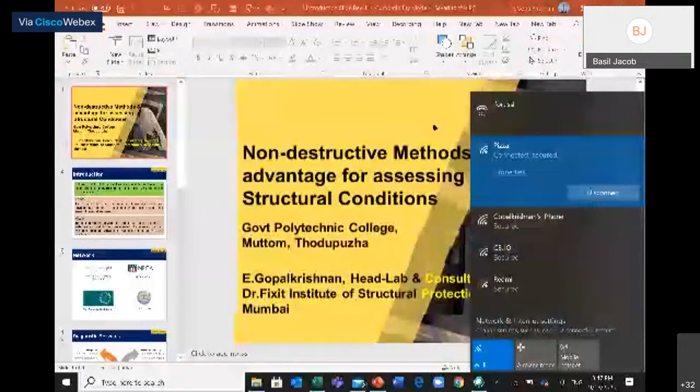Okay, I am coming. Now we're connected with the hotspot so that there is no interruption. You can able to see my screen now? Yes, sir, able to see.

Very good, thank you. So let's talk about this case study before we conclude the session. This is quite interesting. This is a water reservoir, we call it a clarifier at thermal plants. Generally, you can able to see.

It is at NTPC. And what is the problem? There is water leaking from the tank, and also structure deterioration happening continuously. The maintenance team got worried too much. It's been happening a long time. We tried several methods, but nothing worked out. They approached us for understanding the complete study and giving the solution permanently.

So the details: it was at Ramagundam in Karimnagar, 2,600 megawatt, the largest in South Asia, 250 kilometers from Nagpur. It has got 4 clarifiers, but they want to focus on 2 that are deteriorated very much larger. So that's why, sorry, what happened?

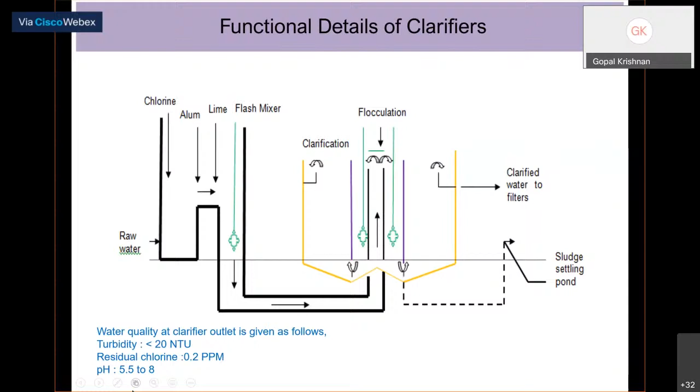So that's our scope. This is a typical clarifier. So how chlorine and lime have been used, mixing with the water, and the water quality expected: turbidity less than 20 NTU, residual chlorine 0.2 ppm, and pH 5.5 to 8. This was the desired output quality.

The thickness of the wall is 500, and M20 grade was used there, and all the joints were leaking, they're broken. I'm going to show the pictures.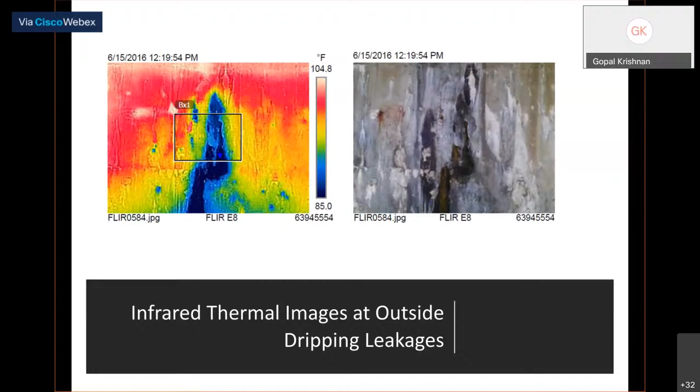Yeah, a close view of the leaching out patches. So when we use thermal imaging, we can able to see the area, the water intensity, or the source of the leakage very accurately. That is the first point. Even in some places we observed not only moisture but water dripping continuously. So both can be identified and assured that this point is a problem leakage spot.

And we emptied the clarifier and inspected clearly after draining water and cleaning was done. Visual inspection was carried out along with infrared thermal imaging to identify the spot. This is the cleaning, the very first after emptying the tanks. Then you can see the floor, because of the damage, cracks, and everywhere the floor got damaged, and vertical cracks everywhere where water is seeping from inside. We have taken the picture.

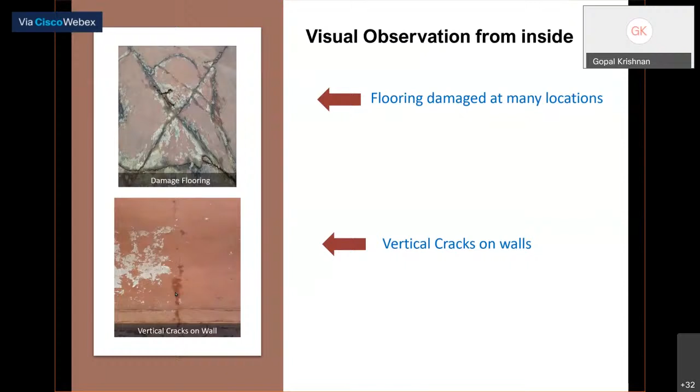So we can identify the weak spots creating the source of the leakage, high porosity, and even minor cracks allowing the water to seep through. Identified. Only thermal imaging can help us identify those areas.

And even the results, what we can see, we have used all the NDT. The UPV result found somewhat satisfactory, only errors of 5% and 6%, less than the unsatisfactory level. And rebound hammer gave a good result, about 30 rebound numbers. So the strength is okay as long as that goes.

But what about the other parameters? Even the cover is adequate, except for 2 or 3 numbers which are not good. But otherwise, in the majority of cases, the cover is also 30 mm, it is provided. The chloride is higher than the permissible limit.

That's the leaching you can see, and the pH lowering to less than 10 in some places, and carbonation 5 to 10 mm from the surface. One clarifier you can see 7 to 12 mm. So carbonation is not much affected, it's at a very earlier stage. The cover is adequate, they've given proper protection.

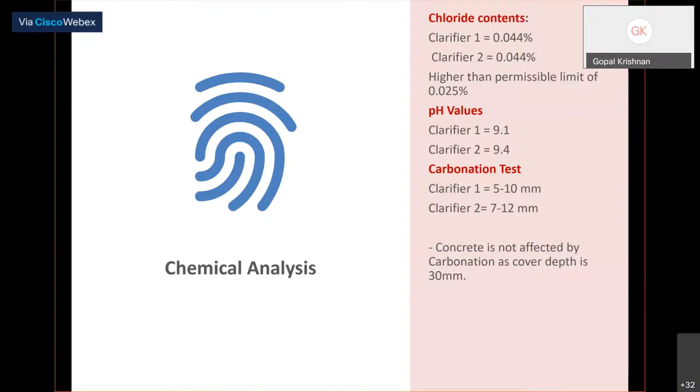But where the problem is: the half-cell potential is showing high risk, medium readings of minus 135 to minus 723 millivolts. That's one issue. The resistivity is also showing inadequate values. Corrosion is happening, so these two things together give high corrosion probability because of the resistivity.

Then we can see the UPV value, less is okay, satisfactory in the clarifier, majority 78%, 83% found satisfactory. And then half-cell potential, if you see 70, 86% is severe, only 14% lower. That means it is high corrosion.

And the clarifier one, how much? 25, 50% probability of corrosion severity and 50% less probability. So overall, the corrosion activity is happening because of the continuous leakages happening in the structure. So we have to take effective action immediately.

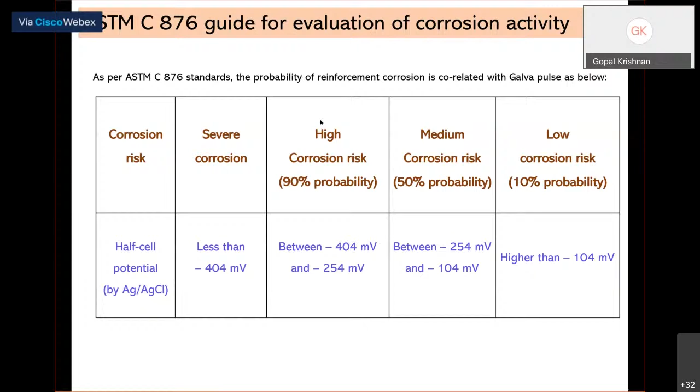High to severe, I said, minus 254 to minus 404 millivolt by silver chloride when we measure. This is as per ASTM C876 specification. Even the resistivity gives very much negative, it is also showing that the probability is higher.

The walls, the final cracks, 1.1 meter height, there are horizontal cracks. Major leakage happening through the construction joint and vertical cracks from ground level to 2 meter height. These are the problems we identified.

When concluding, we can say that visual inspection and non-destructive testing technique show overall condition terms to be good. The average of results seems to be on the better side only. The problem for the leakage is happening through the floor. We can see a lot of cracks and damage in the construction joints. These are the places because of which the corrosion is also effectively very high.

So we recommended to fix the leakages first and repair the cracks from inside the tank and internal surfaces, and give the protection. Whatever repair material you apply, you need to protect it because it's a water retaining structure continuously, there's going to be water. This was the recommendation we have given.

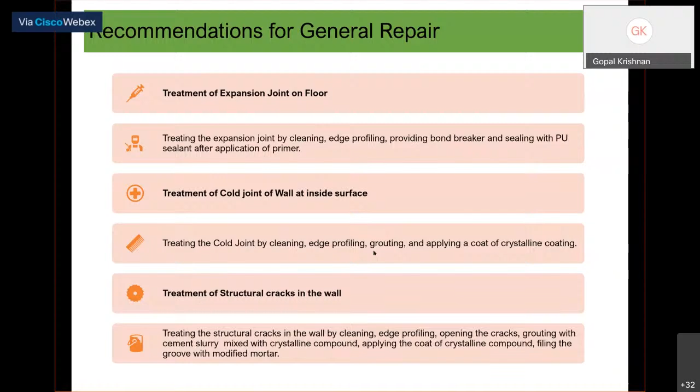So at each point, expansion joint, cold joint, or structural cracks, we told them to repair with a cementitious, crystalline-based product, so that it has crystalline growth and breaks the porosity and makes a proper impervious surface, as well as growth in the concrete repair product. So we gave stage-wise what coating to be given on the internal side, what mortar to be used for repair, and what coating to avoid dampness entering.

The moisture or water into the concrete wall or floor. So we gave the complete solution, and finally we recommended epoxy-based anti-corrosive treatment wherever corrosion happened, and provided coal tar epoxy coating to protect the repaired surface. So this is a BOQ, item-wise we give rate analysis so that customer can take it further.

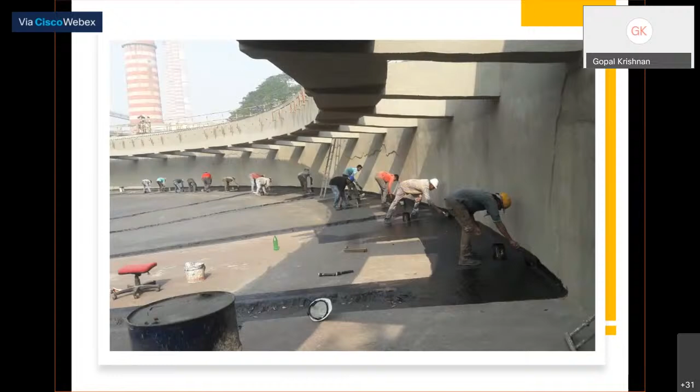So this is a stage-wise photograph. You can see how the repair was carried out, all the 24 joints, and the epoxy coating has been done as a protection measure. Before completion of the job, and this is the completed job. Now still this running, it has been done in 2017. Now last 3 years, almost 3 years now, there is no complaint or anything received so far.

So this is an interesting case study I want to share with you. And finally, before time completes, I'll take a few minutes.

When you want to know the mechanical properties, you select what kind of non-destructive testing is required. If you want to know compression, you take core or rebound hammer or blow test, anything. If you want to know homogeneity and quality, you can use ultrasonic pulse velocity, tensile strength, pull-out test. These kinds of things you can select to understand bond strength, meaning pull-off testing.

After repairing the surface, if you want to know what is the bonding with the substrate, repaired mortar or something, we are able to do the pull-off testing. Like that, you can select what you want.

For chemical properties, electrochemical activity, yes of course, the corrosion activity needs to be done by understanding the corrosion rate, half-cell potential, resistivity, carbonation, the phenolphthalein solution, petrography analysis, and X-ray diffraction, infrared spectrography, etc. We can do that. Alkali aggregate reaction, petrography analysis is a very suitable method. For chloride, we use the analytical method to understand the chloride and sulfate.

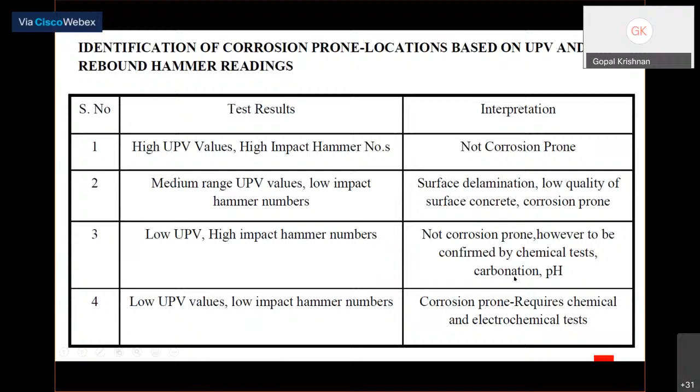So a cover meter is also required. Cover meter with good quality concrete and sufficient cover thickness is relatively not corrosion prone. With bad quality concrete, porosity will increase, making it a corrosion prone zone. Less cover, even with good quality concrete, will again lead to corrosion. We can correlate the results based on these techniques.

Now coming to the concluding session, since time is up, I want to stay in time. The availability of a wide range of NDT devices has made it easier to monitor quality, distress, or durability of concrete structures. NDT devices have proved to be reliable and invaluable, more so than conventional testing.

Depending upon the requirement, any two or more NDT tests should be used to get the required information regarding quality and strength of the concrete for the contractor. Doing just a rebound number test and saying a structure doesn't have strength or stability is not correct.

Interpretation of results is required. A competent person is needed to arrive at an accountable estimation of the concrete's strength. When you use the instrument, you're bound to get a result, but that's not the end of the story. You need an experienced and competent person to interpret the results and guide you properly. That's very important.